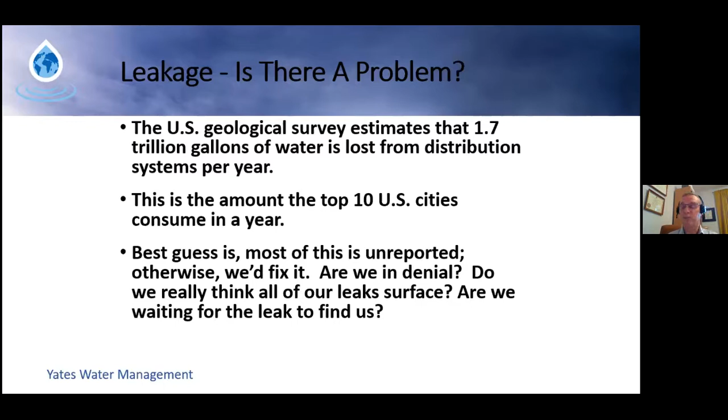We've got apparent losses that are associated with meter inaccuracies, illegal connections, in other words, theft of water, and we have data handling errors as well. But today we're going to really focus on real losses. This is the leakage through the pipes, through tank overflows or tank leakage, and background leakage.

So we'll move into those categories, and I'll explain a lot of that with the new methodology that has been used extensively over the last 20 years. Or at least I should say Halifax Water has been using it extensively over the last 20 years.

So just a little note there to give some context again to Pignon. They have a total supply volume of around 25,000 gallons per day. They actually get revenues for about 4,000 gallons per day. So you can see the problem right away. We've got 21,000 gallons that nobody's paying for. When you do the math as a percentage, that comes out to basically 84% of the water supplied to the community not being paid for.

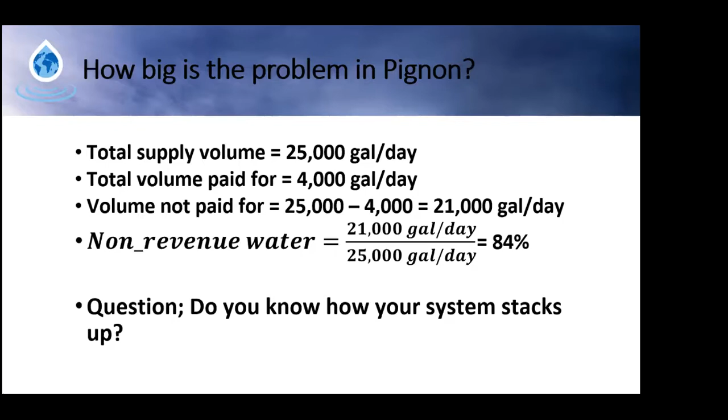So I promised a look at a refined approach for water loss control. There's some good news to share. This is again a world problem. Back in 1998, the International Water Association put together a task force to look at the problem and develop a new methodology to tackle it. Over a 2-year period, this task force developed this new methodology, which I'm going to speak to today.

At that time, it did include a rep from the American Water Works Association. We were pleased to see that because that gave an opportunity to bridge the differences between what was going on in Europe in particular and in America. I want to focus on North America because that's where most of my background comes from, where I've seen some difficulties trying to control water loss. Basically what we saw for the last century was a focus on what we call unaccounted for water, trying to find leaks in a very ad hoc manner.

And really what we saw, there was no real significant advancements in North America before this AWWA methodology came on the scene. I would suggest that there was more than shortcomings. There was no standard approach, and I even tormented some of my American colleagues by saying they practiced voodoo and witchcraft in order to show to some regulator that they were making progress, when really they weren't. They were actually in a state of disinformation.

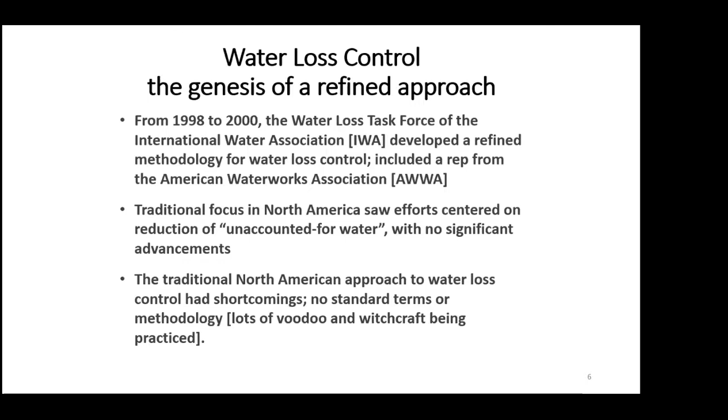So in terms of managing real losses, the foundation of a successful program is to make sure you have a proper water balance to start. And that is basically a water audit to try to determine where your water is going, how it's being used, how you account for it. You should also recognize that when you're doing this water balance, you have to make sure that the data you input into your audit is based on good data. And obviously, if you put in things that are false or misleading, you'll hear the phrase garbage in, garbage out. So one has to be careful when you're doing your audit that you recognize there's a level of confidence with the data that you use.

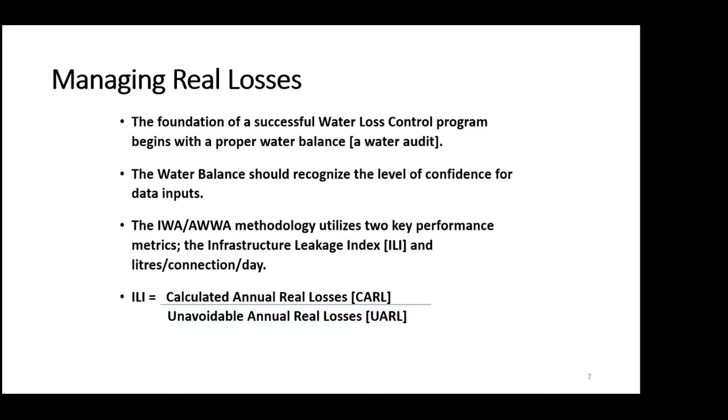Should point out that the IWA and now the AWWA methodology, because now it's been adopted by AWWA, uses 2 key performance metrics, the most famous being the infrastructure leakage index, another one basically measuring real losses in liters per connection per day. But I show you the basic calculation here for the ILI. It is the calculated annual real losses over the unavoidable annual real losses. The calculated annual real losses is developed through this water audit, and it is a definite technical measurable amount.

And the unavoidable real losses come from an empirical formula based on the length of the mains in your system, the density of your connections, and the pressure that your system operates under. Suffice it to say, if you have a higher pressure in your system, you're allowed to basically have more allowance for unavoidable real losses, which makes sense. And I'll show you some of the pressure leakage relationships as I go through.

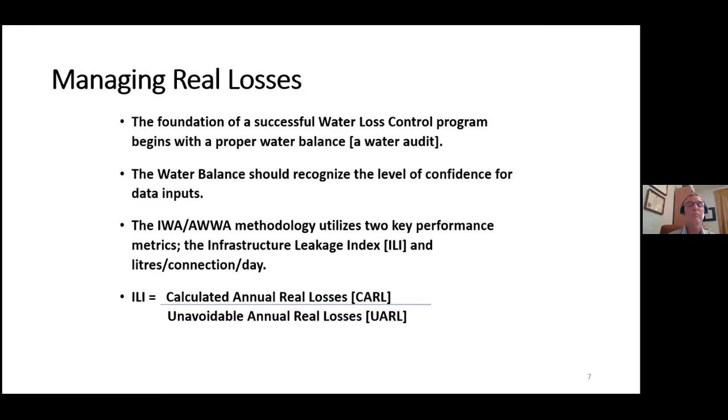So here's the pretty picture I wanted to show you. This is the IWA standard water balance. And what we like to say about this balance is that there's a place for everything and everything in its place. So it's really flipping this whole concept of unaccounted for water into accounting for every volume of water that's pushed through your system. So you start on the left with the system input volume, and on the right, you've got the final calculations for revenue water and non-revenue water. And obviously what you're trying to do is to reduce your non-revenue water as much as you possibly can.

So there's several categories you can see in the screen here, and I won't go through all of those in great detail, other than to remind you of the apparent losses in particular and the real losses. And again, we're going to speak about real losses today, predominantly leakage within the distribution system, which is really where the action mainly happens. And that includes both, of course, your main pipe and the service connections into your customer's premise. And I should point out there's massive spreadsheets to go with this water audit, as you would expect. And once you get familiar with the spreadsheet, you can refine it and tweak it and set targets for yourselves and really set a performance level that you want to pursue.

So here are the 4 strategies for reducing real losses. We've got pressure management on top here, and you can see it can change. As I mentioned, if you increase your pressure, then you can get changes in leakage. So that's why the arrow goes in both directions. You have speed and quality of repairs, and that means making sure you go repair a leak once you know and you're aware that a leak exists. Also have active leakage control. That's doing all those surveys that you should do on a consistent basis.

And at the bottom, you'll see the asset management piece to reduce losses. That's more of a long-term strategy where you make your capital improvements, you upgrade your leaking pipes when they're beyond their useful life, and making sure that you select good materials for your renewals.

So I mentioned earlier about the infrastructure leakage index. It's a ratio of the calculated annual real losses over the unavoidable annual real losses. In a perfect world, you would have an ILI of 1. Now, there's not many perfect places in the world where you should get an ILI of 1.

I can think of some countries where water supply is limited, places like Australia, South Africa, Israel, and yes, some places probably in the Caribbean where water supply is precious. But in other scenarios, in Halifax water, for instance, we would look for a ratio of around 2.5 to 3, because that was closer to what we'd call our economic level of losses.

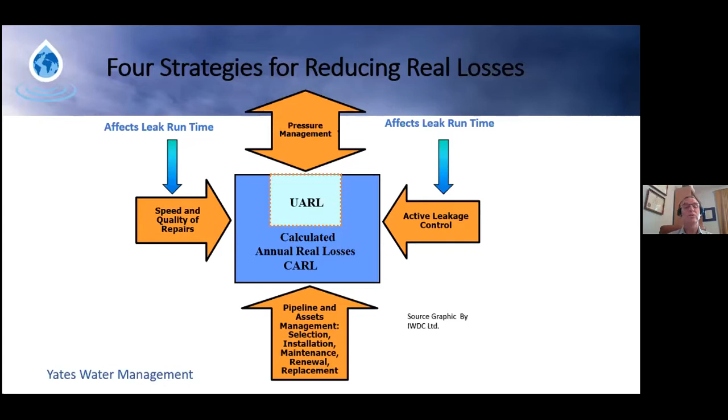So let's talk a little bit about leakage before we move into some of the details about leakage runtime. There's really three types of leakage, and this is described in many of the best practice manuals.

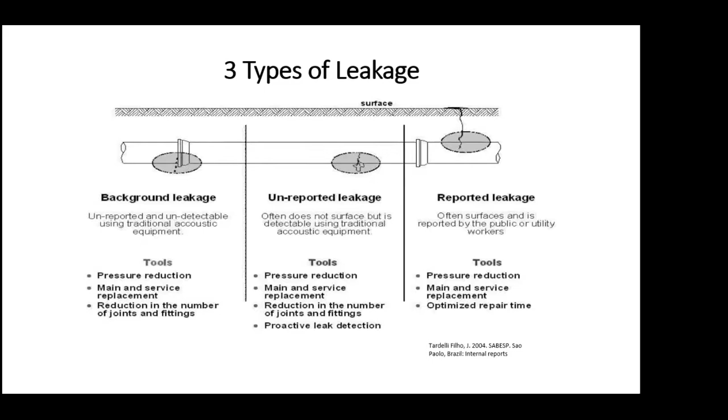If you move over to the center, you'll see the unreported leakage. These are ones that generally don't surface. You don't see them, but they are still detectable using traditional acoustic equipment. And that's important. These are the ones that you spend most of your time on if you're a progressive utility.

These are the ones that will skin you alive if you don't find them early. A lot of the tools that we use are, again, pressure reduction, that long-term strategy of main and service replacement, reduction in the number of joints and fittings. You get a lot of weeping, obviously, and leakage at joints. And again, proactive leak detection, to really be looking for them way ahead of when they will find you.

And over to the left of the screen, we have background leakage. These are unreported and generally undetectable using traditional acoustic equipment. They're very small. They're the weeps at the joints. They're the ones you're not going to see. They're not economic, actually, to go find. So there are still tools, however, you can use to reduce background leakage.

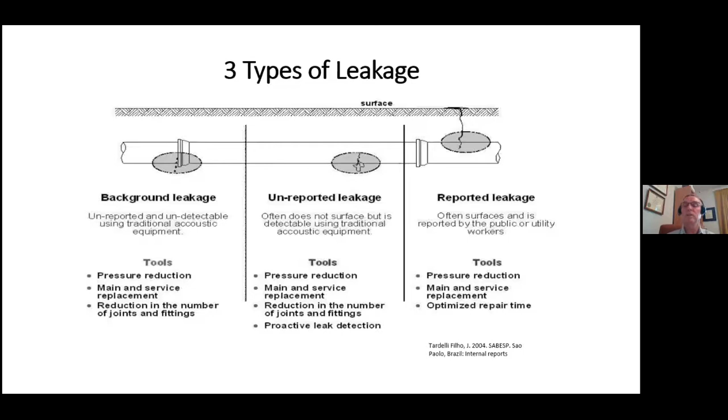Again, pressure reduction is a tool that works for all three. Again, you replace older mains with your normal capital program, and again, reduce the number of joints and fittings where a lot of the leakage occurs. So those are the three types of leakage to understand. But really what we're after, if you're going to be a progressive utility, is going after the middle one. The unreported leakage is the one that gets most utilities in the end.

So I mentioned about leak runtime awareness and how important it is, and this is a very famous and simple graph for people to get their head around. Leak runtime consists of three segments of time. One is awareness. So in other words, do you actually know you have a leak? And this is usually the longest amount of time in the equation.

Leaks sometimes run for a long time before they are detected or seen. Once you know you have a leak, you send a crew out to locate it using often acoustic, digital, or other ground microphone techniques. And then, of course, you have to organize a crew to dig the leak and repair it. And each one takes time.

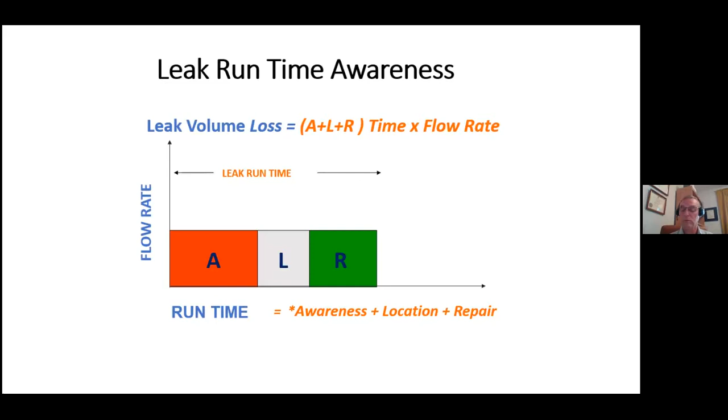So the shorter you can reduce the time frame, the better off you're going to be. And to illustrate that point, here's actually two leak sequences that we had in the system in Halifax Water.

I want you to focus your attention first on the bottom left for a big leak. That's an obvious big leak, and you can clearly see it on the screen. This is a screenshot from the supervisory control and data acquisition system, the SCADA system, which measures flows and pressures in real time. So this leak here that you're seeing is 200 cubic meters per hour.

It's a big leak, and we got an alert through our normal reporting procedures. We actually have alarms set on many of the systems, so one of our operators got a page on their phone, quickly looked at the screen, knew where to go look for that leak, believe it or not, and went out and shut it down. So in 1 hour, that leak was controlled.

But that's not your problem leak. It's a real big leak indeed. But look at the graph in the top right-hand corner now. You can also see a leak in this system. As a matter of fact, you'll see a leak over a 9-day period. I want to explain what you're looking at for those perhaps who are not familiar with SCADA graphs. You'll see a nice repetition, these are the diurnal repetitions of water use in a specific zone in the distribution system of Halifax Water.

I want you to pay particular attention to the bottom left of this screenshot. You'll see some of the low points of usage, and that's of course night flows, since water is not used very much at nighttime. But you can also see what happens over time: all of a sudden there's an increase in night flow. It's not really use, it's night flow, which actually means more likely there's active leakage.

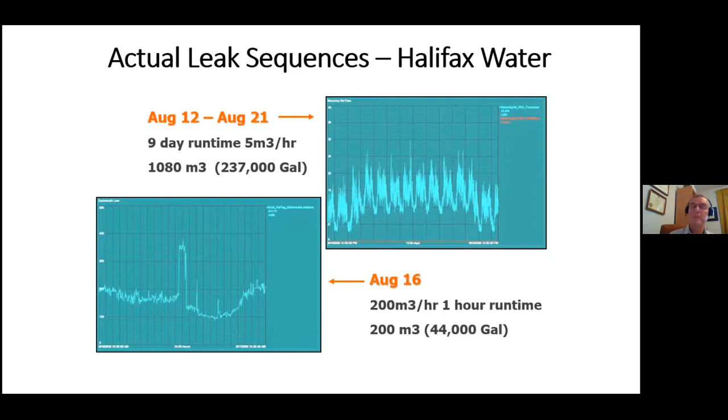So managing leak runtime. The key to managing leak runtime to reduce real losses is the critical thing you need to focus on. And not only that, there's also the willingness to repair leaks. Once you find a leak or detect a leak, you have an obligation to repair it. Find the leak early, find the leak small — that's the mantra for water loss control.

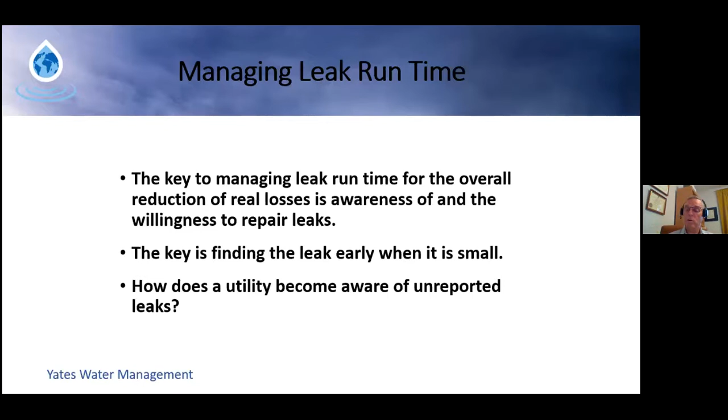So how do we find these leaks that are small and under the unreported category? They're found using district metered areas. There's a lot of progressive utilities that have adopted this strategy, and it's certainly a best practice in the world now — extensively used in the UK, some utilities in Canada and America, extensively used in Australia, Germany, and Austria. Many countries have adopted this methodology.

So DMAs can provide the awareness of leakage in near real time because you're monitoring your system through SCADA. That's part of this whole approach as well — you need to have a robust supervisory control and data acquisition system monitoring pressures, flows, tank levels, and the like throughout your entire distribution system.

You break up your distribution system into manageable zones, these DMAs, into smaller systems so you can send a 2-person crew out to find a leak in a couple of days by acoustic leak detection. That's generally what I've seen work well.

You should be able to find a leak within a couple of days within a specific DMA with a 2-person crew. This also allows you to continue monitoring your flows, particularly what's happening between 3 and 4 in the morning, since that's when most people aren't using water. You can set targets based on that minimum usage. And to throw in another adage: if you can measure it, you can manage it. That's really what this is all about—measuring flows, measuring where the water is going, measuring how much is being used, and then chasing the low-hanging fruit where you can find that exacerbated leakage.

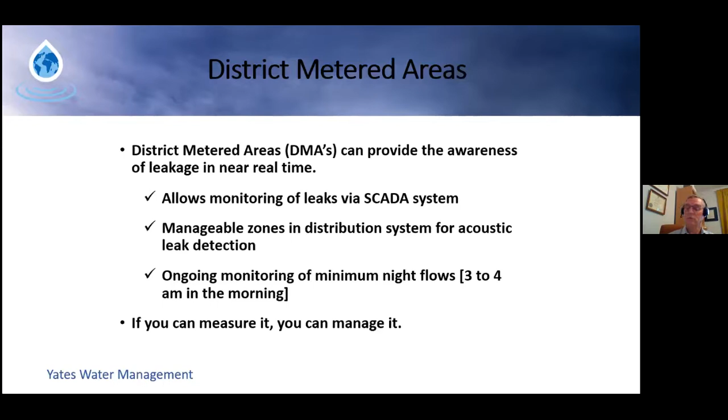So often people talk about size—yes, size matters, but in many cases it's opportunity driven, and the size can really be predetermined. For instance, if you've got a boosted system, that is automatically a DMA. You might also have existing pressure zones that are the right size for your resolution and leak detection with a 2-man crew over a couple of days. So some already exist in your system, right in front of you. In other cases, you'll have to break them up into smaller zones to get better resolution.

Is smaller better? The answer is yes, if the opportunity exists, because you'll get better resolution and reduced leakage runtime. But your DMA sizing is based on many factors, including acceptable leakage runtime and your night flow analysis. If you don't have a problem with your night flow, don't break up your DMA—if you're only seeing very low flows at nighttime, there's no reason to. Typically, what we see in many utilities is a DMA consisting of around 30 kilometers of pipe, about 200 hydrants, and about 3,000 service connections.

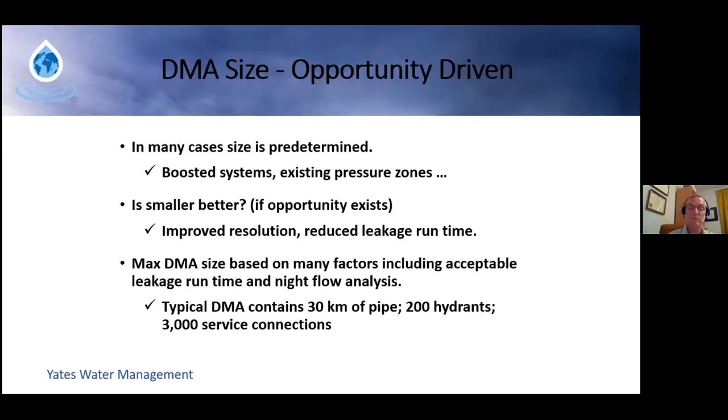Here's a typical DMA in the Halifax Water system, and this is a boosted zone. It's a natural, easy zone to delineate, but it's also important to recognize that boosted water is usually your most expensive water. Halifax Water pays a lot of attention to this because it's actually the most expensive water they produce, since it's boosted three times before it reaches the customer.

In the bottom right-hand corner of this screenshot you'll see the attributes for this DMA: around 27 kilometers of pipe, around 155 hydrants, and just shy of 2,800 service connections. In the top right-hand corner, you can see a SCADA shot for this zone, with the scale in cubic meters per hour, broken up into 0, 50, 100, and 150 on the y-axis.

You can see the night flow I keep talking about, and the SCADA system shows a night flow of around 20 cubic meters per hour. Just below that graph is our calculated minimum night flow, which we compute based on metered usage for customers and estimates for commercial users. Our minimum night flow calculation says it should be just shy of 19 cubic meters per hour. So we can assume this is a very tight system—we wouldn't worry about looking for leaks here. We walk away with a smile on our face; we don't have to send anybody looking for a leak. It's a very, very tight system, and we're pleased.

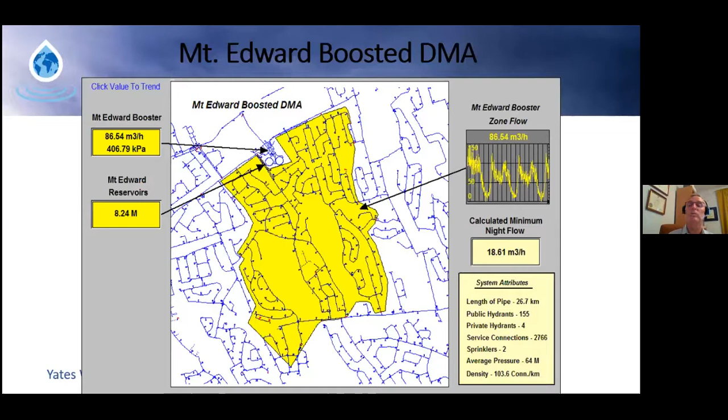I want to blow this up a little for people to see. There's much more you can do with this data as well—you can get a real sense of what's happening in your system. So this is a 3-day period for that same DMA I just showed you.

On the bottom, you can clearly see the diurnal curve repeating itself over a 3-day period. I always like to tease the audience with this one, because you can clearly see that one of these days is not like the other. These are 3 days in a row—2 are almost identical. It's amazing how exact they are in terms of repetition.

This is a Sunday, Monday, Tuesday usage pattern for this particular DMA. You can see Monday and Tuesday are the two to the right—they're identical. People are getting out of bed early, having a shower, and going to work. And of course, you can see the Sunday crowd on the left sleeping in. The pattern is very different and easy to detect as a different day.

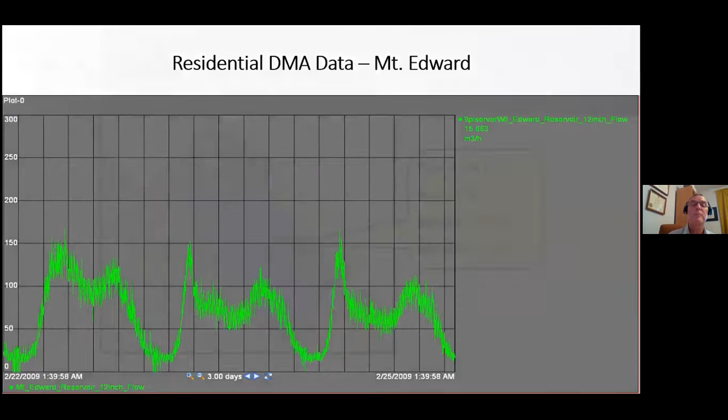Sometimes you might have an area of your distribution system that's too large for good resolution and refinement for leak detection. So I want to show you what Halifax Water did for one of its areas, the Halifax Peninsula—the heavily populated area of Halifax. We had a DMA to start of 114 kilometers of pipe, about 600 hydrants, and almost 9,000 services.

I mentioned earlier that 3,000 services is not a bad benchmark to shoot for, so that tells us maybe we should try to divide it by 3. Let's see if we can break up this DMA. I often say breaking up a DMA to find a leak is like finding a needle in a haystack—sometimes it's very difficult. A better way to find the needle is to break up the haystacks. So instead of one big haystack, we'll break it into 3, and use our other tools to find the needle. I like to use that analogy when I'm looking for leaks.

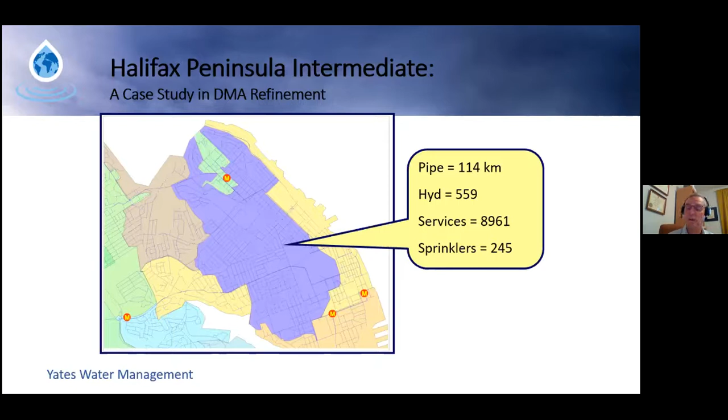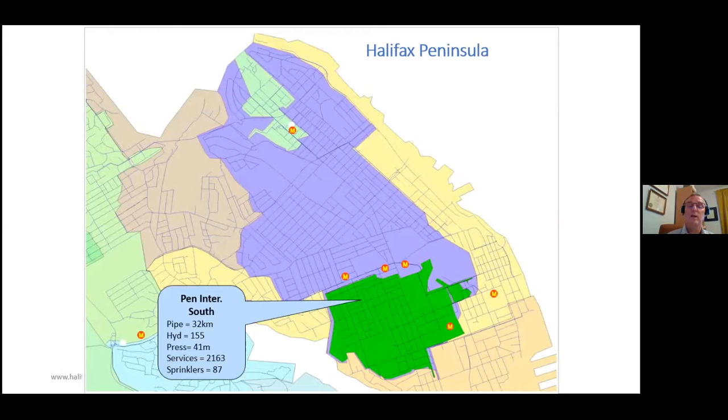So here's what we did: we dropped in 3 master meters and closed some boundary valves. We actually closed valves so water was forced through 3 areas, and you can clearly see where they're forced through those meters. Now we have another clean DMA with 32 kilometers of pipe. We dropped in 2 meters in the north end of Halifax, and voila, we have a second DMA of 36 kilometers of pipe. Again, closing a lot of boundary valves gave us a very tight DMA with no flow across the valves. And by default, we have a third DMA.

So those are the distinct DMAs that Halifax Water now uses, and they're able to find a lot more leaks as a result, in a shorter period of time.

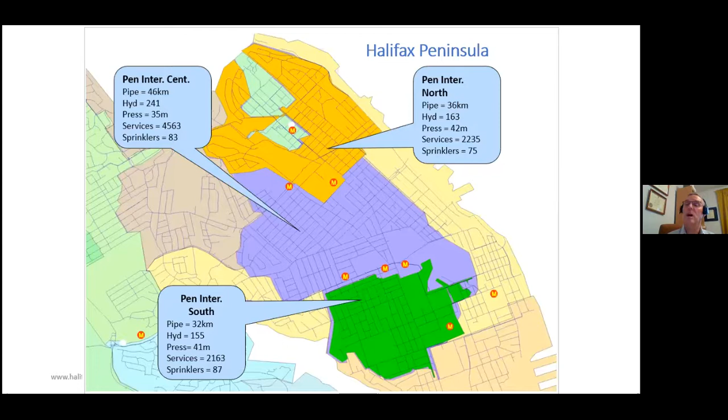Here's a standard flow chamber—it's not rocket science putting this together. This is pretty standard, just a basic meter chamber with a mag meter dropped in. This meter is actually designed to be flooded, so if there's groundwater it won't hurt it. There's also a tap for a pressure transmitter, so we can determine pressures there as well. We put a remote terminal unit nearby on a telephone pole that sends the signal back through our SCADA system. You can see in the bottom right shot a very simple installation—the remote terminal unit panel up on the pole, and the antenna to send the signal back to headquarters.

Total cost in Halifax was roughly $25,000, so a very good investment. I should point out that the leakage we found with these minor capital upgrades paid for itself within 2 years, so it does not take long to get sustainable results.

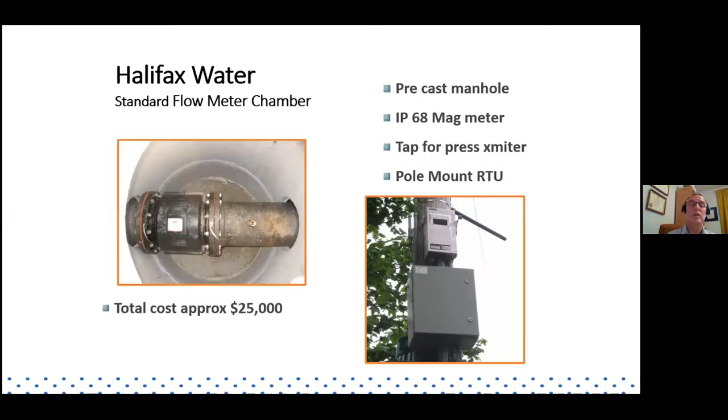I also mentioned active leakage control—doing these surveys on a regular basis through your system. This is still a traditional approach that still works in a lot of utilities, and we used it in Halifax Water initially. We rely more now on the DMA approach, but nonetheless we always do leak surveys at least once a year, in the spring, in particular after we do our flushing of hydrants.

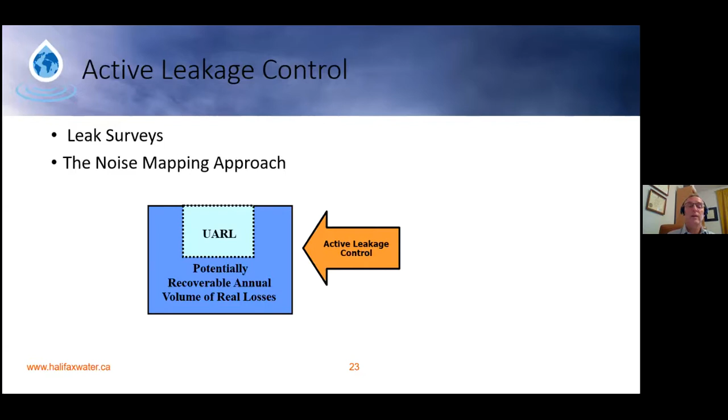So this is still a practice in Halifax. When I say the noise mapping approach, I want to explain what that is.

First of all, we use a lot of the traditional equipment that many of you probably are familiar with. These are ground microphones that we can go out and attach to any appurtenance that is connected to the water system, so that could be a hydrant or a valve.

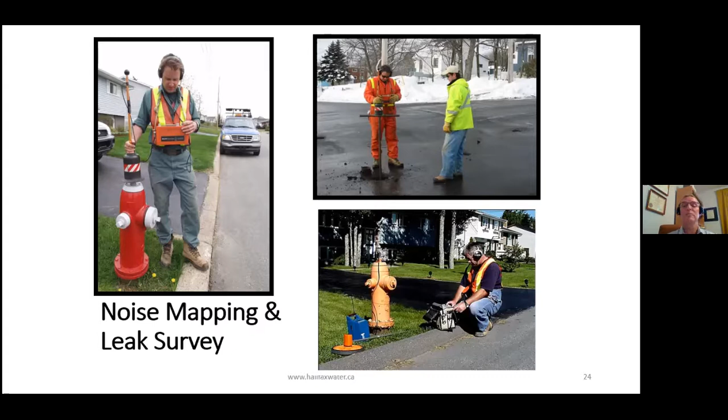And of course, in Halifax, we can do this in all weather. You can see on the right-hand side, that's obviously not something that you folks in the Caribbean would see very often, but it is a regular occurrence in the north.

So we start with a very simple basic map. We actually started with maps of our system, and our operators would go out and sound every hydrant and valve and listen with the ground microphones and try to put in a figure for how loud the noise was. We had a range of 0 to 100.

Anything that's screaming, really loud, sounds like a serious leak, that's 100. If everything is quiet and silent, can't hear a thing, that's a 0. And they use a scale in between. We teach our operators over time to calibrate their own hearing to that scale, to understand what's loud and what's quiet.

So we actually went back in after this leak survey and found 2 leaks in that area. That's how noise mapping works. It is exactly that: you use a map, listen, and simply record your interpretation of noise levels.

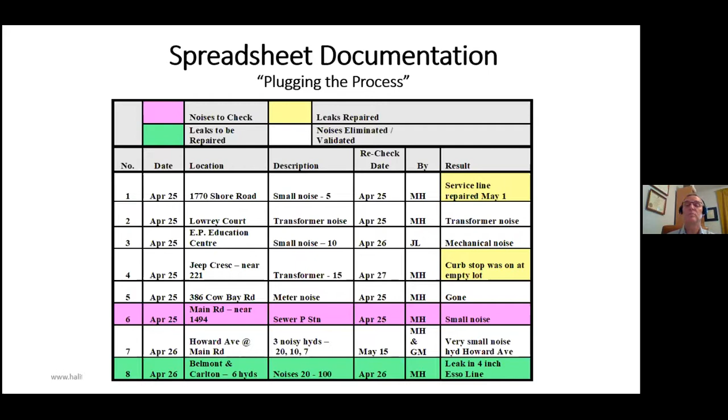So I'm going to show as well where you can extend the benefit to your customers. Often customers have their own unique internal distribution system, and they have the opportunity to stem leakage and be good stewards of their own water supply.

So we actually worked with many of our customers to help them reduce water loss on their own internal distribution systems. Here's an example: we worked with the Port of Halifax. We told them we could help them reduce their leakage by monitoring in real time at their points of sale, where we actually sell them the water.

We could hook up flow monitoring equipment to SCADA to show in real time what's actually happening in their system. Now, you might say, why would we bother to do that? Because we could still sell the water. As some accountants sometimes say, happiness is a metered leak.

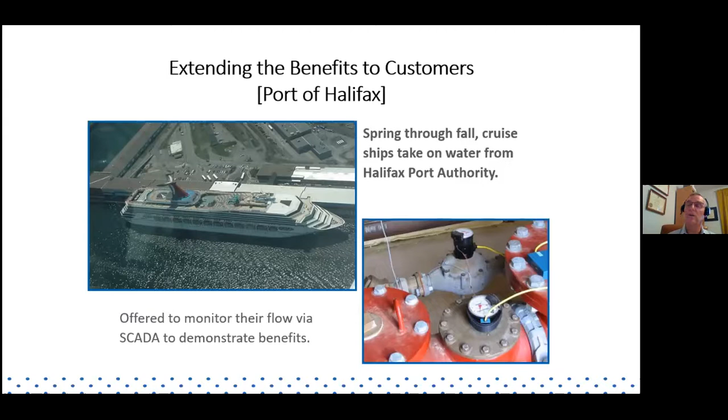But we felt, no, we shouldn't do that. We should be good stewards and work with our customers so they don't waste water. So here's an example: we worked with our customer and put a monitoring device on their meters, and monitored, of course, in real time through SCADA.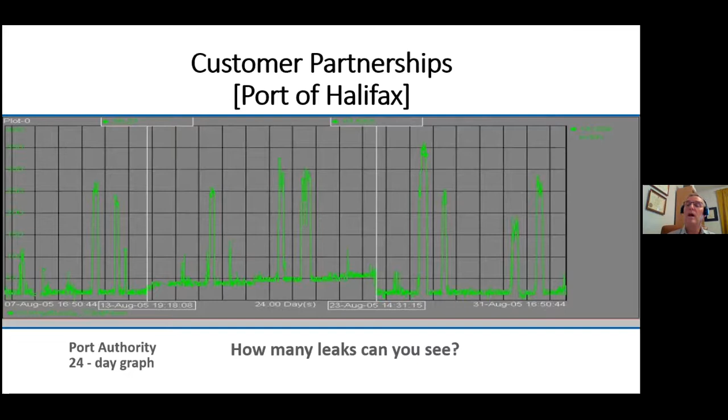So we actually provide this service now to the Port of Halifax and others on a fee-for-service basis. So we do charge a monthly fee to monitor their system for them. But the water that was lost in that one leak paid for the service for the whole year. So that was good value for money. So Port of Halifax are very happy with us. They can look at their own leakage, and we can look at their leakage. So both of us can look.

So here's a simple installation. Again, you're getting to see that standard RTU panel. We have the same standard approach for all of our meters. You can see that little advertisement there for SCADAPack, but nonetheless, it works very well. That's the remote terminal unit that we'll then hang up on a telephone pole. You can also see a large meter there. This is actually a turbine meter to your left and a positive displacement meter to the right. So this is actually a compound meter that goes into the port.

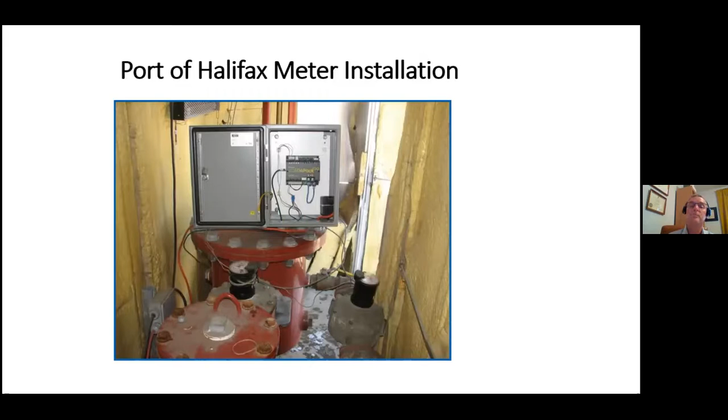And here's a lovely screenshot of a leak that was picked up through that meter. Many of you might think the leak actually is in the light blue. I'm going to tell you, no, not really. The light blue is kind of the normal flow that you see on this screen. You can see some diurnal repetition there. And then, when the leak happens, the positive displacement meter basically maxes out. It can only flow so much water, and you see it maxes out there.

And you can see that consistent flow in the middle of the screen, that nice light blue. That meter is absolutely maxed out. That's that smaller 1 1/2-inch positive displacement meter. Most of the leakage, of course, is going through the turbine down below. There's a different scale, so you have to be careful to point that out. The green is a different scale than the blue. But you can clearly see down there in the green, that turbine is howling water through that meter.

So the good news is the port did indeed go out and fix that leak. And often they've actually used Halifax Water crews to help them find the leak, which is another fee-for-service that the utility can provide.

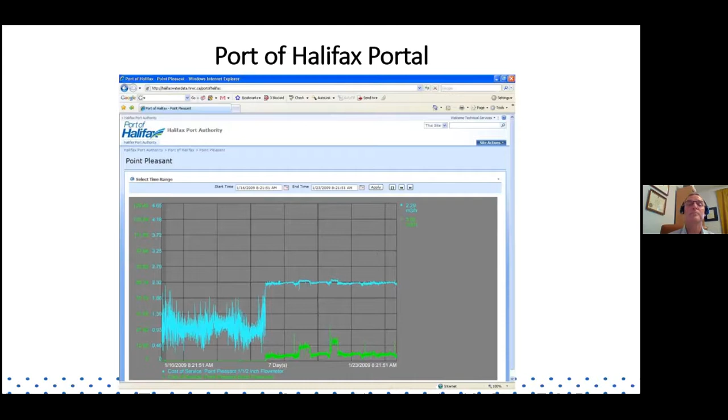Okay, so last but not least, I'll spend some time now with pressure management, because we talked about the pressure leakage relationship earlier and how important it is to control pressure in your systems. It is definitely one of the key strategies that has been promoted by the AWWA water loss control methodology. If you reduce pressure, you will reduce breaks, and you'll also reduce background leakage. And of course, there is absolutely a direct relationship between pressure and the amount of leakage of a pipe. And I'm going to show you that very clearly with these next few slides.

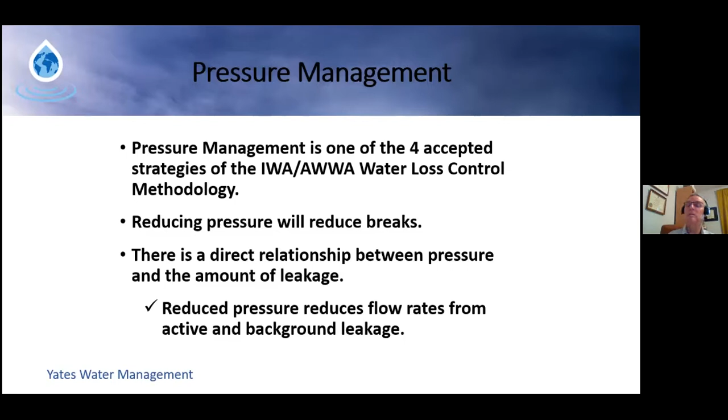So here's a leak under pressure. This is a leak that was dug in the Halifax Water system. Now, we did throttle the valves a little. We still were allowing it to leak a little bit under control, because this is a bit of research that Halifax Water is doing. So we were shutting down, just had a little bit of water still going into the main, and dug up the leak. You should be aware this was actually an unreported leak. It was leaking into the nearby storm sewer and getting away.

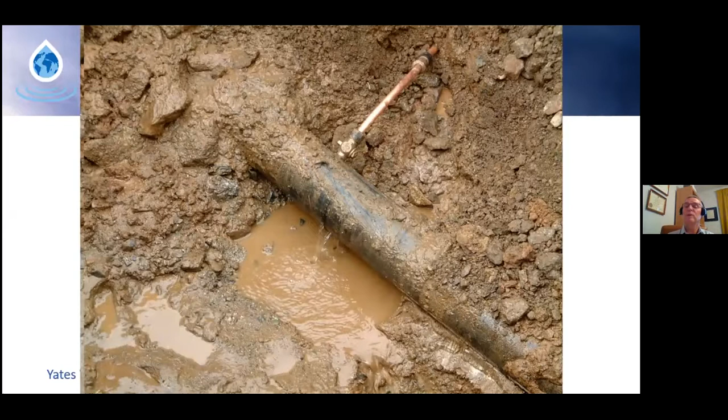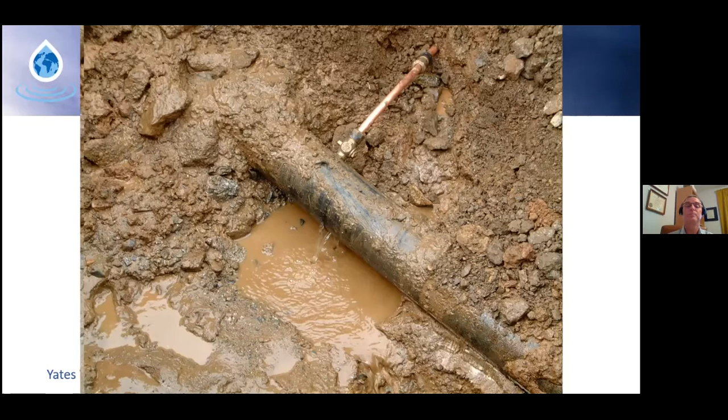So here it is under pressure. As now we turn down the valves to make them tight, the water is now starting to drain towards this leak, and you can clearly see there's less leakage. And as the water starts to drain even more, there's not much more pressure now at this site, and now we have a little trickle. And soon there'll be no water, and our crews will then go out and put a clamp around this. They did not actually have to cut this pipe. They simply put a repair clamp and then flushed the main, disinfected, and put it back in service. So you can clearly see the relationship here with pressure. So very important that we manage pressure.

And there are several ways you can manage pressure, but probably the most common is the fixed outlet control. And this is still tried and true, and this is very useful for utilities to use this methodology. It's basically using either a diaphragm or a piston type pressure reducing valve to set a downstream pressure below that valve to control pressure at a constant rate. Very useful, often used throughout the world.

But now there's new ways. We can also now control pressure through what we call flow modulation. We can allow now the downstream pressure to trend with the flows. So as flow goes up, we can allow the pressure to go up with it. As flow goes down, we can drop with it. So we can actually now manipulate our systems so we don't allow excess pressures, in particular in the nighttime. For those who know, pressures naturally creep up at nighttime, so we can learn to control those and drop the pressures when those flows are lower. We're all going to do a better job with leakage control in our utilities.

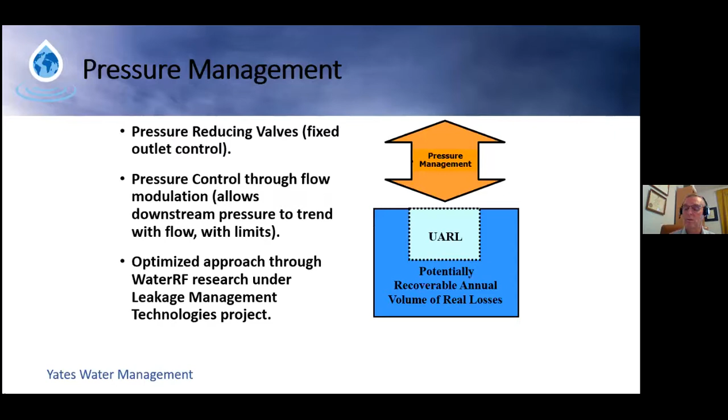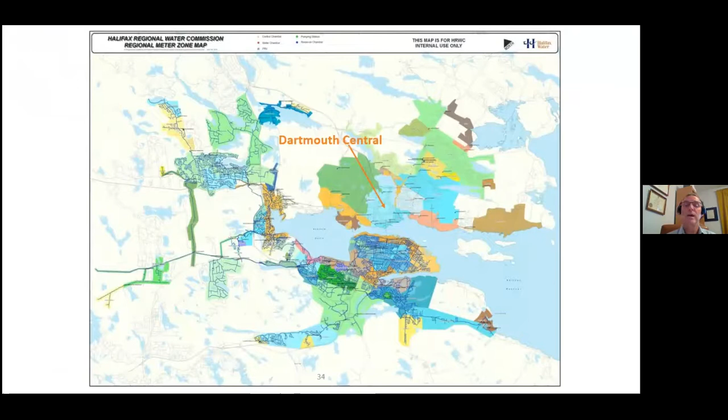The good news is a lot of research has been done with this, and Halifax Water actually was part of a leakage management technologies project with the Water Research Foundation, where we put together a prototype to show how this could work. So here's the research project. So again, here's that pretty picture you saw earlier with all the different colors, the sizes and shapes of our DMAs. And here's one we're going to focus on called Dartmouth Central. So I'm going to blow that up now so you get a closer look. Again, it's a little bigger DMA than most. It's about 60 kilometers of pipe.

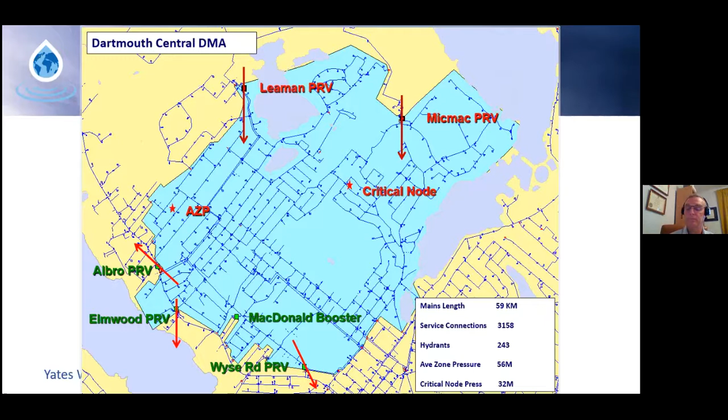So now I'm going to show you a graph. Being an engineer, one must show you graphs.

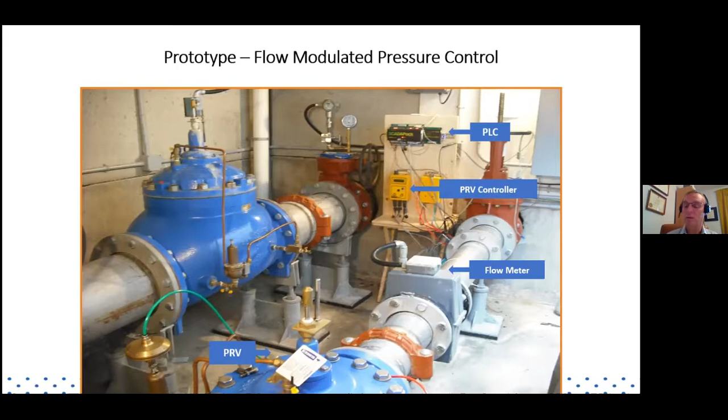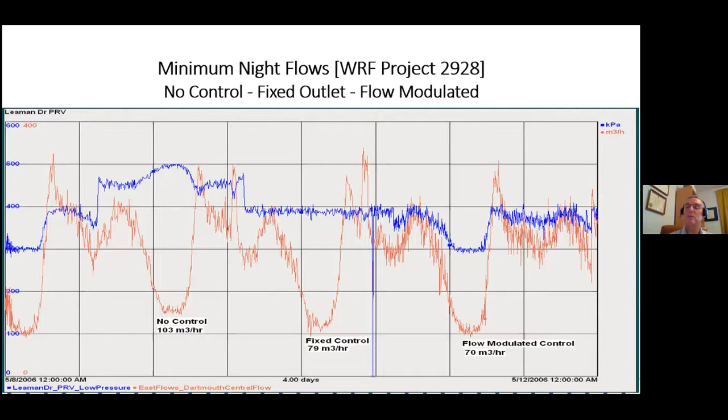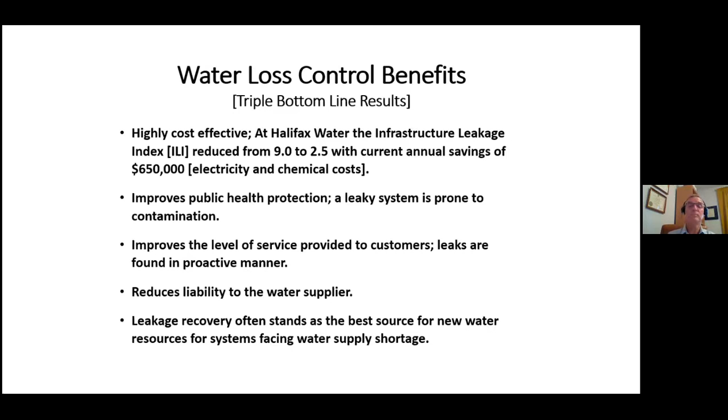Some of the lessons we learned about this methodology: you saw a lot of technology. Yes, technology does play a part, but there's a lot more at stake here. It's about change management, it's about trying to do something different. We had to spend a lot of time with our staff to convince them that this was a new methodology, that we were going to try something different, because we were tired of digging a hole and not getting anywhere with it. So as your mother and father always said, when you're in a hole, you should stop digging. So we stopped digging and took a different approach.

You need project champions, and I say often plural. You need more than one that are very enthusiastic about this and will actually lead the initiative. We look for those leaders in every utility, and I know the folks listening today, you have them in your utilities, and I hope they'll step forward and really embrace the methodology and bring everybody along with them. You should involve as many people as possible. This is one of those great methodologies and strategies where you need to involve many departments, and the more the better. You need to involve your distribution system, your treatment plant folks, your meter department, you need to have your customer service folks on side, and you need your finance department on side.

Everybody's got to buy into this new methodology. It's a wonderful thing when you get everybody to buy in, because you also bridge these silos when you start to respect each other's services and provide utility, and you get breakthrough results as a result. Not an easy thing to do, but that's really a big piece of the change management, getting your corporation to buy in.